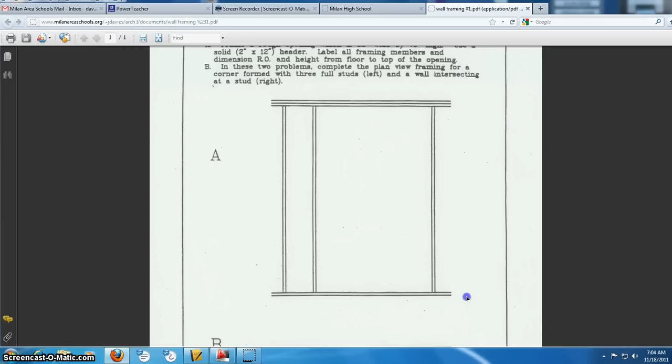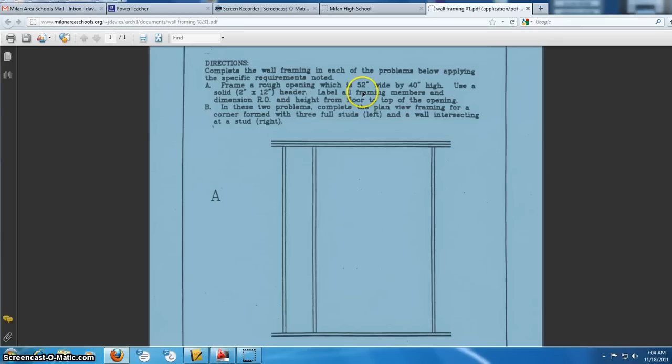What I am about to show you now is how to complete the wall framing assignment number 1 here. In this area, we're going to recreate exactly what's on the screen right here, and then we're going to end up putting a window in this thing at a particular size, and all those sizes of everything are up here in the instructions, so I'm not pulling these measurements from anywhere but using these that are up here.

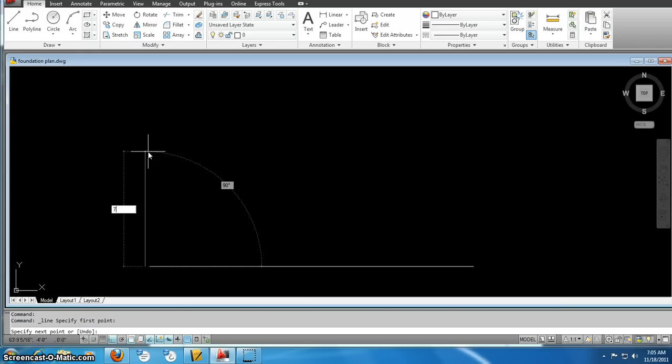So the first thing we've got to do is recreate this part right here. So I'm going to start off by drawing a line. I'm going to say 10 foot. So 10 foot's relatively big. The size of a stud is 7'9". So I'm going to come up 7'9". And then I'm going to come over to the right another 10 foot again. I didn't notice that I didn't drag that all the way over, so I will make sure I connect that.

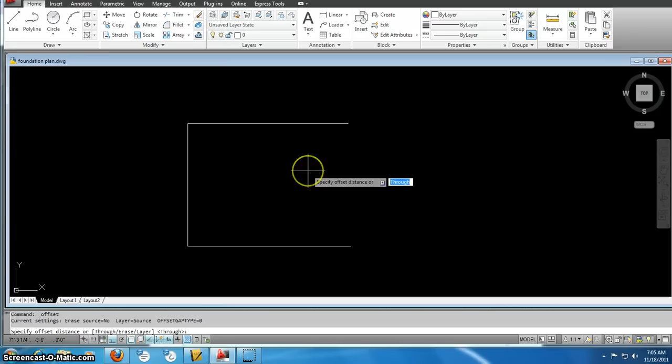So what I'm going to do is create my bottom plate and my stud right now. So I'm going to hit the offset button, and this is what is the offset distance you'd like to go. Before I click anything, I'm going to hit 2 enter. It says what do you want to offset? So I'm going to offset my bottom plate down. I'm going to offset my stud to the right. I'm going to offset my top plate up, and then I need a double top plate on the drawing. So I've almost recreated that thing on the piece already.

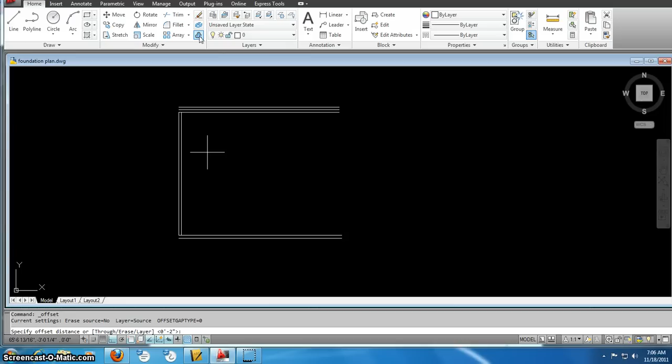Now there is a certain distance between each stud, and those distances are going to be 16 inches on center. So I'm going to hit offset, and it says what is the offset distance. I'm going to go 16 enter, and I'm just going to choose the outside line here and go to the right. So every 16 inches there's supposed to be a stud in here, and in this scenario as well I'll go 2 enter for the offset command, and I'm going to make the thickness of those studs.

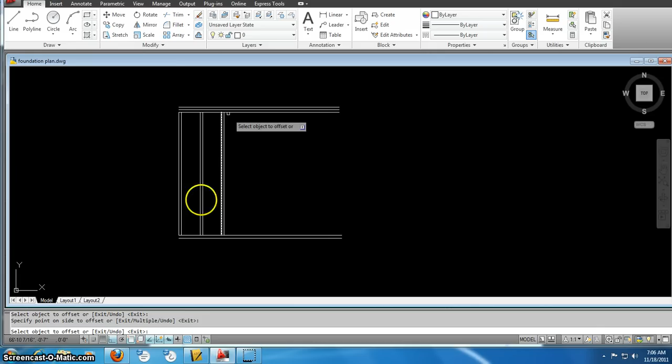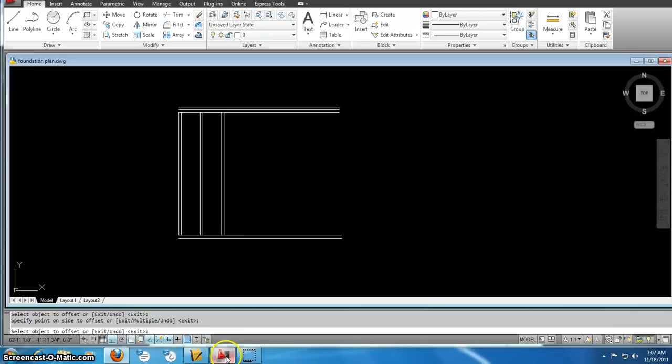Now what we've got, it said that the box on the assignment was like 52 by 40 high. So I know that half of 52 is 26, and I know that half of 40 is 20. So I'm going to make my box 26 by 20 down. So let me show you what I mean by that. Actually, I've got to do one other thing first.

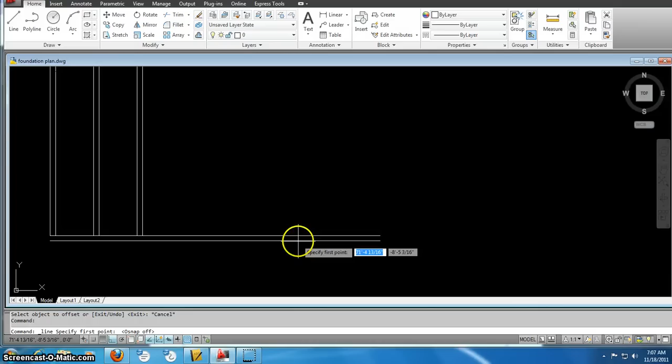The top of a header is typically going to be 6'8". So I'm going to draw a line. I turned my O-snap off if you didn't see that, so it wouldn't snap to the end there. And I'm going to draw a line from here, and I'm going to come up at 6'8". Now what that just gave me, I'm going to turn the O-snap back on now, is a spot where I can start, not my wall, my whole opening from.

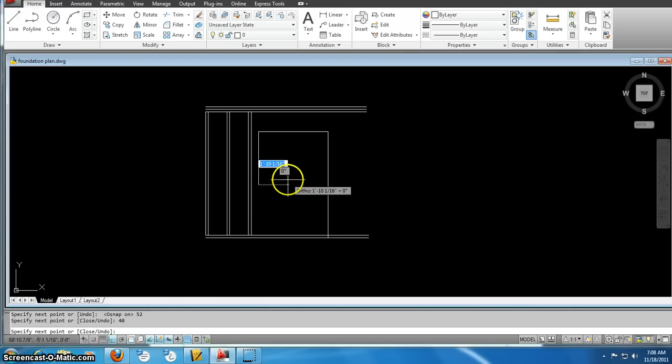It said that I was 50 wide. Actually it said 52. I just want to make sure I type it in right. 52 wide by 40 high. So I am going to go 52 enter, by 40 enter, 52 enter. So what did I just create? My window opening.

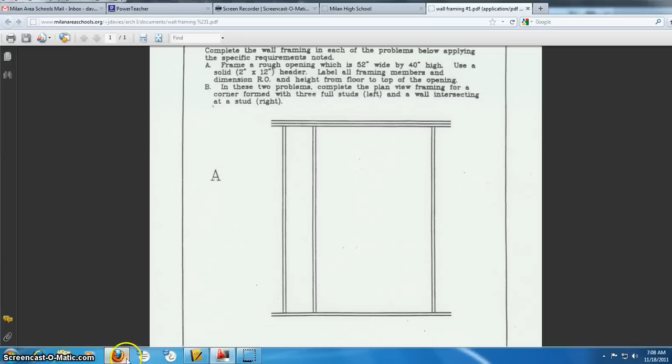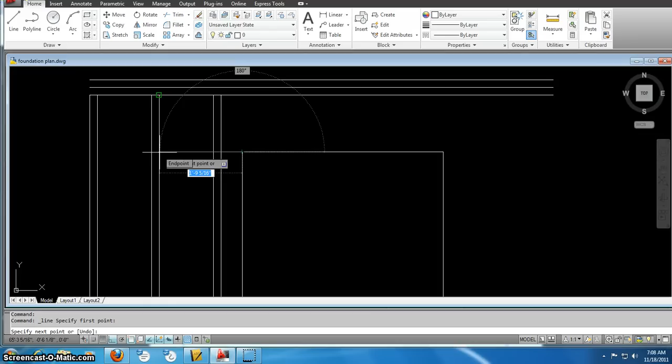Now what we need to do is place a header in here, and if you look at the assignment it says that the header is a 2x12 header. It's going to look something like that on the page. You're not going to see the 2-inch part of it, you're only going to see the 12-inch part of it. Now what I'm going to produce here is a spot for my trimmer first. So I'm going to go here and come over 2 inches, only because that is going to be the size of my trimmer. So I'm going to go 2 enter, and I'm going to come up then at 12 enter.

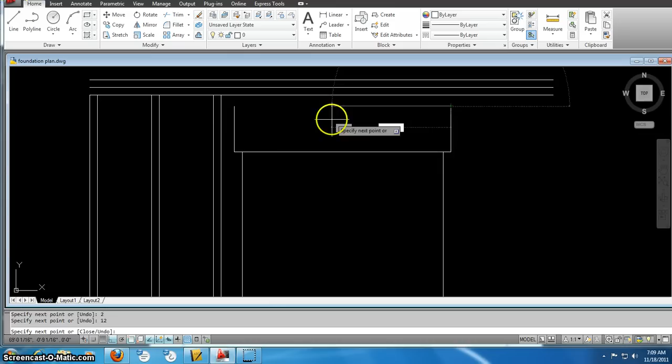I'll be able to explain this a little bit better in just a second. I'm going to do the same thing on the other side. I'm going to go from there. I'm going to come over 2 enter, up 12 enter. And then I can go ahead and connect it across. My mouse is really jumpy in this program.

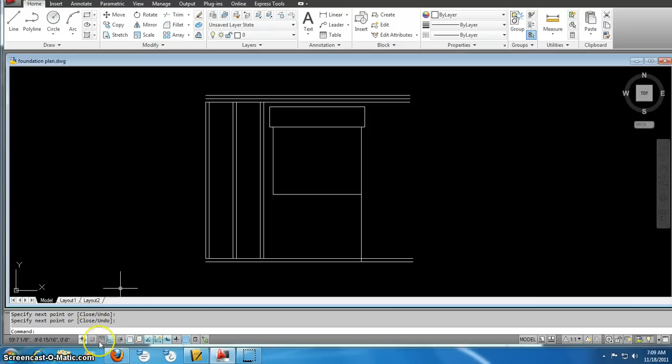So now this is my header. Well, what holds the header up? The header transfers weight around the window opening. So what I have now is I need a trimmer to hold up the header. I'm going to turn on my polar tracking button. It should help me do what I'm about to do.

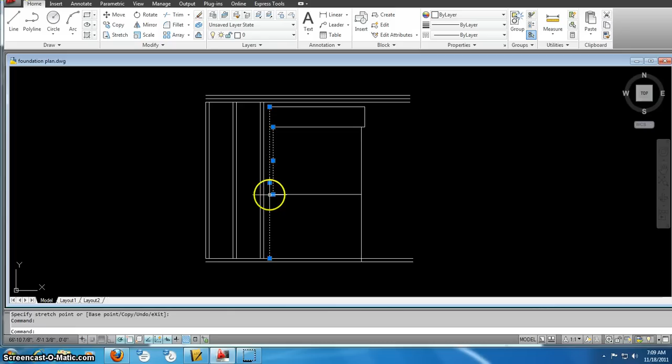I'm going to select the outside of that header line. I'm just going to drag it all the way down. I'm going to select the inside where the window line was at, and I'm going to drag it down. What I just created right there is a trimmer. Now this piece of wood right here, this trimmer, holds up the header.

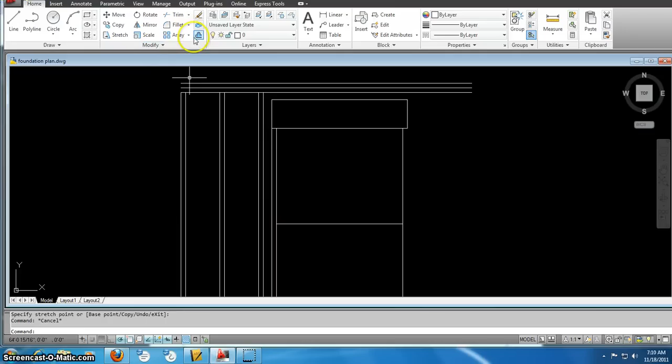Now in every single one that we do, a trimmer holds up a header, but then we have to have an outside stud. So I'm going to come over here and hit offset real quick. I'm going to go 2 enter. Select the line. I'll go way to the left of it. Now this space right there is my outside stud, so now I've actually got to select that, and I'm going to run it the rest of the way up.

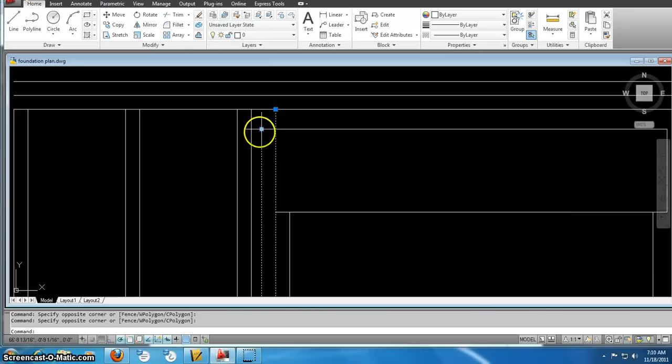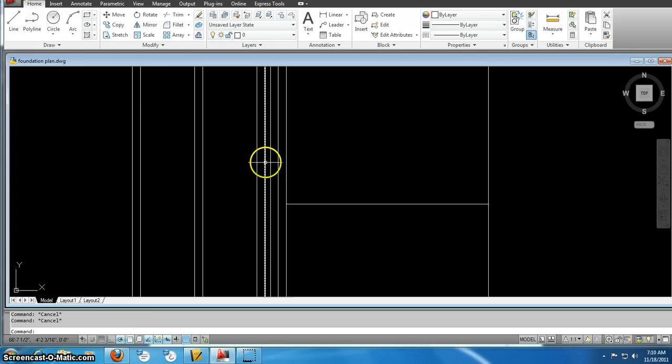So there's my trimmer that holds up my header, outside stud. And the outside stud goes all the way down. So when I look at it right now, it looks like I've got 4 pieces of wood all in a row. Well, this one right here is a stud that's every 16 inches on center. This is actually a space. There's nothing there. This is the outside stud. This is the trimmer. I'm going to do the same thing to the other side.

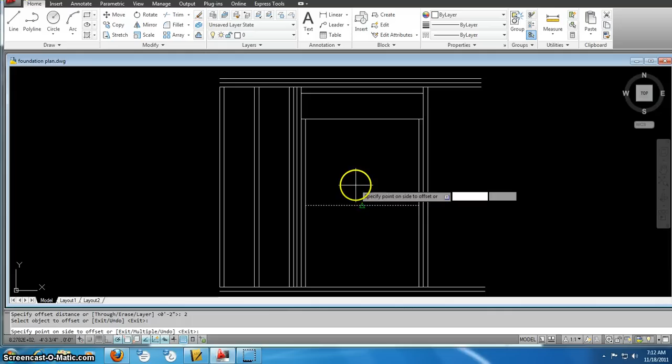Alright, I just finished up the other side, and once again, you've got a trimmer that holds up the header, and I've got an outside stud. So now I'm going to go ahead and offset my windowsill. And now what I need is the cripples, and the cripples are the smaller studs. In this example, they'd be there to transfer the weight to the header. The header then would transfer the weight to the trimmer, and then the trimmer would transfer the weight down to the bottom plate. Well, on the windowsill, we definitely need to be able to attach drywall and things to.

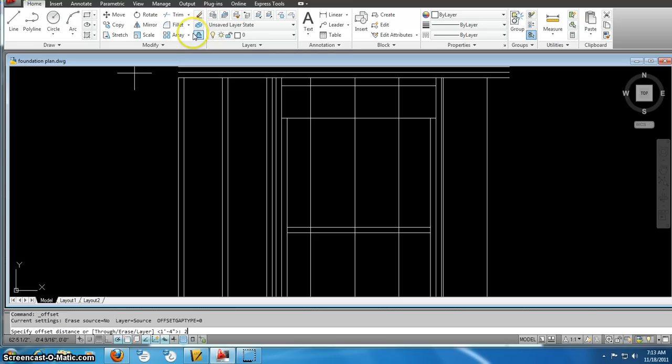So I'm going to come over here and hit my offset button. I'm going to type in 16 enter. Now this line right here was my normal 16 inches on center line. So I'm just going to go this way with it. Keep going with 16. Every 16 inches, no matter what, there's a stud, so we can attach drywall. Okay, and each one of those studs is 2 inches thick, so I'm going to go offset 2 enter. This one over as well.

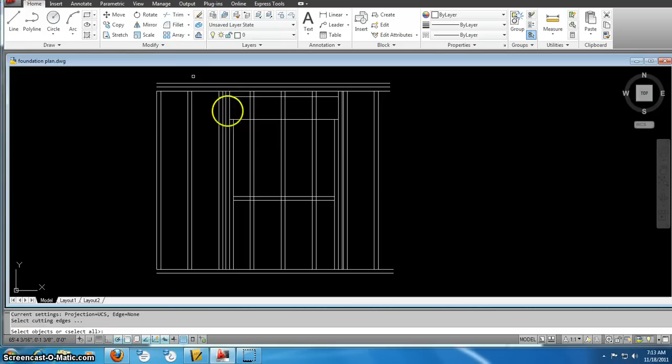Alright, so obviously I can't have my cripples going through my window and my header, so I'm going to come up here to my trim. I'm just going to select the top of the header, and I will select the bottom of the windowsill, and then I'll right click. And it says, what do you want to trim out now? Well, I obviously don't want these lines inside of there, so I'm just going to draw a box around them. So that just gives me my 16 inches on center.

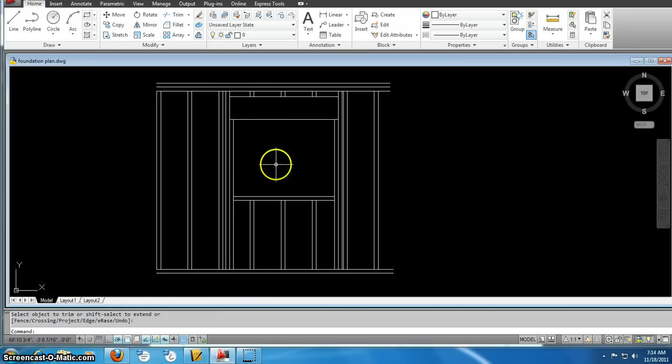Now if we look over here to the right on this one, we've got a trimmer that holds up a header, an outside stud. That is actually a gap or a space. There's nothing there. This is my normal 16 inches on center stud. This is a normal 16 inches on center stud. And you will be finished with the drawing after that.